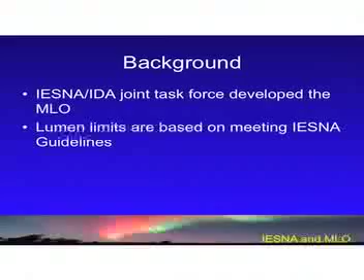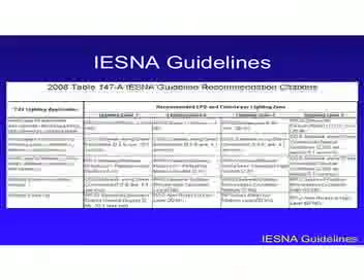When we went through the board review, some of the boards of directors, which was IDA and IES, asked us what criteria was used to develop basically how much light you needed in an area, and what guidelines were being represented. This is kind of a mapping of IES guidelines that was used for the Model Lighting Ordinance. I just wanted to show you that there was something we could point to in every single lighting zone to represent what the criteria would be.

Lighting zone 0 is not there. That was something else we created during the Model Lighting Ordinance, realizing that we needed to have a lighting zone that encouraged no light at all. If a light were on, it's only intermittent, meaning if you have a light near an entry station for a trailhead, when someone approached, the light went on, but when someone left, the light went off. So it's basically not expected to be energized during the course of the evening. Lighting zone 0, of course, has no criteria because it's an intermittent type of light.

The Model Lighting Ordinance's big premise was to not only reduce the amount of excessive outdoor lighting, but also reduce sky glow. The third thing was to reduce light trespass, which is that light in your neighbor's eye or bothering your neighbor. It's a complaint light.

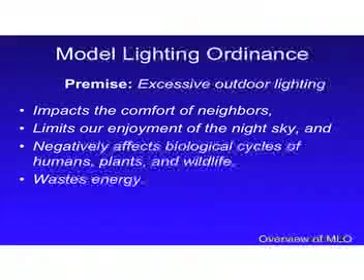Also, in this age of energy usage, wasting energy is a huge issue. So we're looking at some way of reducing energy usage through better lighting or more effective lighting.

The Model Lighting Ordinance is designed to really help city planners and municipalities look at both their new lighting and their existing lighting. The existing lighting would be addressed again during certain renovation periods. Every municipality is going to have a certain trigger point for when lighting needs to be redone, and in the Model Lighting Ordinance, we're making suggestions of when that may occur. But municipalities basically have their own trigger point for renovation.

The good news about having Leslie Lipstein on our task force is that she kept reminding us what city planners were all about. She said, don't write code language for us because we're all really specific. What we need in the Model Lighting Ordinance is the technical information that has been vetted through the technical societies and through the International Dark Sky Association.

This was the important information, so you will see things in the code, like enforcement, that need to be developed by the municipality, because we're not going to tell them how to enforce their own codes. We're just saying you need to have a section there. So in the Model Lighting Ordinance, you will see a lot of reference guiding the municipality through the process, but saying we feel this is important—please don't change the technical portion of the code. But there are other things you are able to change.

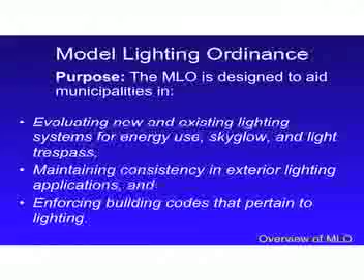The model lighting ordinance basically applies to all exterior lighting. We do have some exceptions there, which are pretty typical exceptions.

Street lighting was an exception in version 1. We've now made that an optional code, or it could be a guideline depending on the municipality. Sometimes street lighting isn't governed by the planning department, it's done by Public Works. So we're not sure exactly where that ordinance would fit in the city process, whether it's in the code itself, guidelines, or policy. It could be policy, but we decided to include it.

In the public comments, the inclusion of street lighting was the number one comment we got. We listened and made a provision for that, which I'm personally very excited about, having street lighting included.

Controls and curfew is something else we've put in, meaning all lighting has to be controlled in some way, and you have to reduce it by at least 30%. That 30% value is there specifically for high-intensity discharge sources that have a real problem going much lower. You can go to 50%, but not all HID sources can be dimmed to that level, and we wanted to make sure we allowed a way to dim the lights rather than just turning things off.

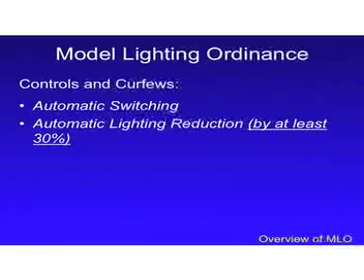For lighting zone 0, we put in the user guide some information on where it may be applied, which would be wilderness areas, parks and preserves, and undeveloped rural areas.

The beauty of the lighting zones is that any community can decide what lighting zone it's going to be. The lower the lighting zone, the stricter the requirements are. A community could say, we are lighting zone 0, we don't want any light on at night or after a curfew time. They can choose to do that.

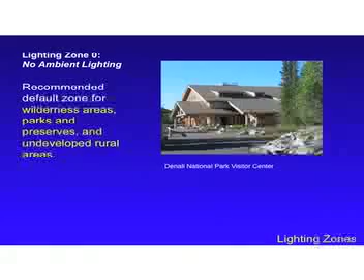Or a community could say, we are lighting zone 1, which means we want and respect really low light, very low glare, and so forth.

But in the user guide, to help communities, we've given some instances. For instance, lighting zone 1 is the recommended default zone. So if a community has no idea what they're doing, they could make their default zone for rural and low density residential areas lighting zone 1.

Lighting zone 2 is the recommended default zone for light commercial business districts and high density or mixed use residential districts. An entire town could say we are only lighting zone 2, or only lighting zone 1. You don't have to have multiple zones in your town to make it simple.

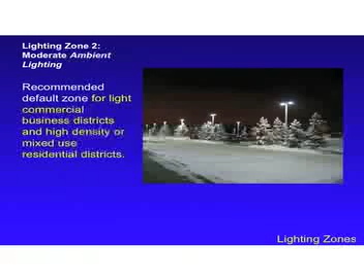So it could be as complicated or as simple as you want. Lighting zone 3, moderately high ambient lighting, is the default zone for large cities' business districts. It would also be the default zone for things like car dealerships or high-end retail that's operating all night long, or you could definitely put a car dealership or gas station in lighting zone 2.

We'll go through an example of how a gas station fits into lighting zone 2.

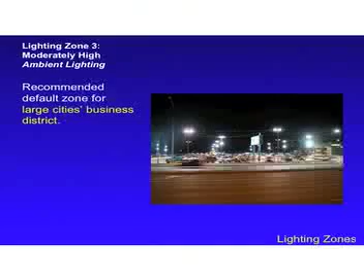Lighting zone 4 is not a default zone, and this is really important. You'll see a lot of high levels in lighting zone 4. We needed somewhere to put in Times Square and Las Vegas, it just had to go somewhere, and just in case they wanted to actually look at their lighting.

Currently in California, through Title 24, their energy code, all their defaults are lighting zone 2 and 3, and that is based on population.

Towns below 50,000 people default to lighting zone 2, and cities over 50,000 default to lighting zone 3. There's a provision that if any city wants to apply for lighting zone 4, at least a portion of it, they can go through that application. In the last 5 years, not one city has asked for lighting zone 4. So currently in California, there is no lighting zone 4. It's a very unique zone, and a lot of us are hoping that no one ever applies for lighting zone 4.

These lighting zones have been really abused in some of the processes. If you look at different codes, I'll use the U.S. Green Building Council Site Credit 8 as an example, which supposedly is for exemplary lighting. Our firm is one of the reviewers for Site Credit 8, and I'd say 80% of the applications coming in say that they're lighting zone 4 so that they can get more light. What I'm excited about is that with the model lighting ordinance, instead of designers and engineers trying to decide which lighting zone they're in, the communities are now going to dictate that and do some planning.

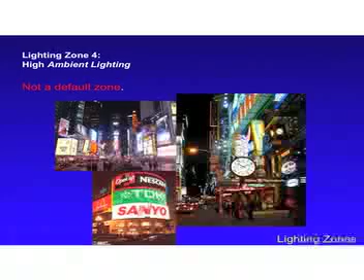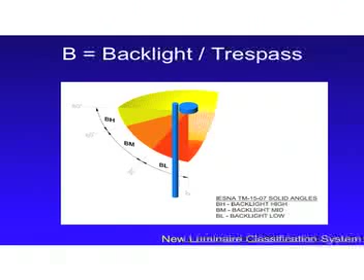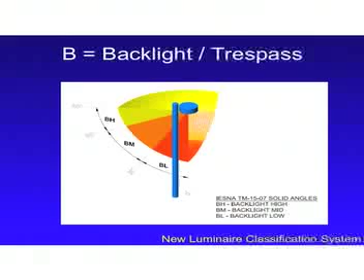If you look at the backlight, which is the B in the BUG system, we're very interested in the backlight low, which is the area that could be directly on the property line, and then the backlight mid and backlight high, depending on the different amounts of light coming out of the zones. The uplight goes beyond what the typical full cutoff was, and it dips down to 80 degrees.

Because of this, when you look at the different uplight ratings, you'll notice that some of them are not U0, but even U1, because of the control of the 80 to 90 degree range. So looking at this is a real improvement, hopefully, over the older system.

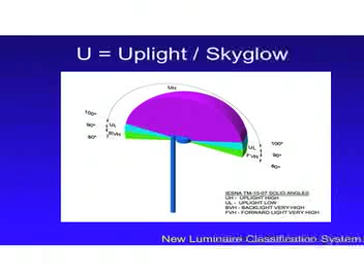The glare metric is something that is brand new to the system, which the older system just could not address. We were able to introduce a whole new metric to luminaires, and this is the glare, which is backlight high and backlight very high. All of this information comes out of TM-15, which is the IES document.

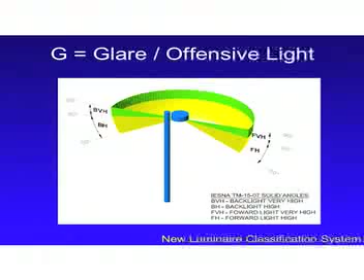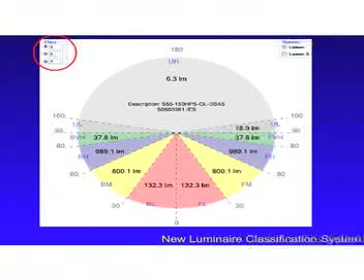Here's an example we got from a luminaire manufacturer, thank you, to show how you would take a luminaire and classify it, going through to look at the different amounts of light that come out of a distribution. Please notice that it's not based on percentage of light anymore, it's based on absolute units.

This is important because you could have the same fully shielded light with a 1,000-watt lamp in it, and it may be BUG 6 or 7, but that same fully shielded light with a very low wattage compact fluorescent could have a BUG 0 rating. So it's no longer dependent on the shape of the luminaire, it has everything to do with what type of light source is in it and how much light it's putting out.

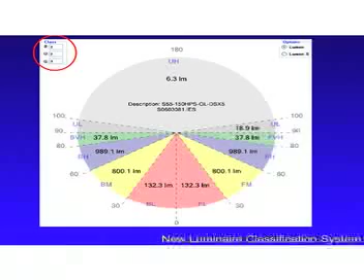But as that luminaire moves closer into the interior of the property, there's going to be less limits on the backlight, to the point where if we're in the middle of the property, we may actually want light coming out from two directions, which would be a typical type 5 or symmetrical distribution. So we need to be able to allow for symmetrical distributions with this.

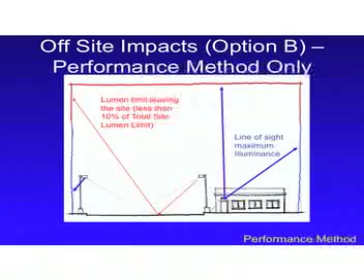That's the second option in the off-site impacts. With this, we actually have a maximum line of sight illuminance. The reason we call it TV illuminance, and a lot of people have asked what that means, is that standard lighting programs have that option. It's something you click, and it's called TV illuminance.

It was basically designed for sports lighting, where a TV camera wanted to see how much light was available to see a player on the field, and they could aim at anything. So you take your TV illuminance and aim straight at the light, see what the offending light is, and that's how you calculate it. It's already available in the computer programs, and that's why that word TV illuminance is used, to make that blend between them.

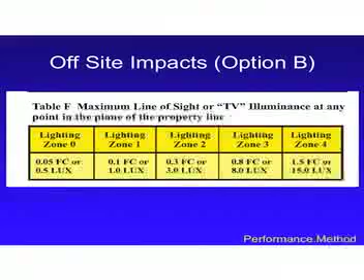So that's the off-site impacts. Now I'm going to go through two different ways you can comply with the model lighting ordinance, and show how off-site impacts are addressed in both. I'm going to go over the off-site impacts again in particular. We've got the prescriptive method.

I would probably say 99.9% of applications will use the prescriptive method. We want to make this very simple. We heard last time, during version 1, that the prescriptive method was too complicated, so we backed way off on it and made it easier. The performance method is for areas where city planners are throwing up their arms and just hoping it's going to work.

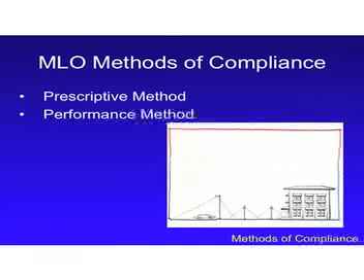This is going to be for the sports field, the outdoor retail, the monument that's being uplit, or the big, huge facade downtown. The performance method is basically for when everything else fails and you can't meet it through the prescriptive method. But we wanted to at least have that option available.

In the prescriptive method, there are two different things you have to do. One is your total site lumen limit—this is to prevent overlighting; you only get so much light on the site, period. Second, your luminaires have to meet the bug rating per lighting zone. So those are the two different methods of doing it.

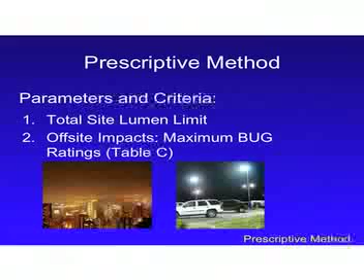Within the prescriptive method, we've got a very simple method for the mom and pops, little grocery stores, areas with a few parking spaces that aren't going to go through a huge city planning effort. This is the simple parking space method, for 10 spaces or less. You basically count up your number of parking spaces and multiply it by how many lumens per space.

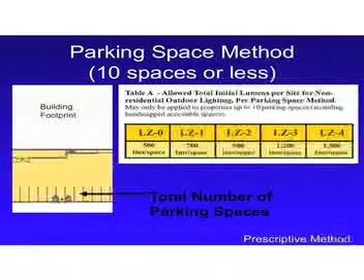Now I want to back up. These lumens that I keep talking about are a unit of light. That's what the light bulb or the lamp puts out. You can see it on the packaging. We figured this is very easy for city planners to use, it doesn't involve any calculations. You basically take your initial lamp lumens, what it's going to put out the day you turn it on, count those up, and that's how many lumens you get per space. So this is simple: an inspector can go out on site, look at the light bulbs, see the packaging or get a count of the initial lumens, add them up, and see if it complies.

The hardscape method, probably the most popular method, basically says you get so much light per square foot of your space, similar to lumens per acre, which some communities have been using. But we're limiting it to your hardscape, which is parking lots, walkways, plazas, anything with finished hardscape. Even a gravel sidewalk or gravel path would count as hardscape. You get so many lumens per square foot of hardscape.

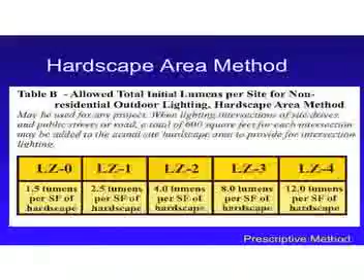Here's an example of how you would calculate your hardscape. You've got, in the gray or putrid green area, your square foot area. If you've got a place wider than 10 feet, represented in blue, you cannot count that - that allows for large islands or landscape area. You can't count your landscape area. But if you have little medians going into the parking lot, you can count that if it's less than 10 feet. This is similar to what planning departments already do for drainage calcs, asking for the square footage of hardscape areas. We're trying to use information that planning departments are used to gathering. Notice it's not distinguished between driveways, sidewalks, or parking lots - it's just hardscape area.

We also haven't looked at facades. We haven't done anything else. All your lighting, all your lumens have to fit within this lumens per square foot, to keep it as simple as possible.

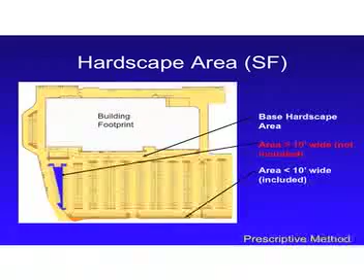One thing we noticed going from version 1 to version 2 of the model lighting ordinance was the incoming LED invasion. We kind of ignored LEDs, or said they're not going to be as important as we thought, but they are. You have to realize LEDs do not have lamp lumens. How they're designed is you put LEDs in a fixture and photometer it, and it's a fixture lumens or luminaire lumens. That's how LEDs are now done.

Well, that would advantage them tremendously if we did not put in an adjustment factor, because all the other lamps are put inside a luminaire and there are losses inside that luminaire. So a typical lamp like a 150-watt metal halide only gets so much light usable out of the luminaire, but LEDs get to use it all. So what we've done is put in an adjustment factor: if you have LED lighting, you multiply your initial lamp lumens by 1.4. That's assuming a 70% typical efficiency on most luminaires. It seemed fair enough that LEDs are multiplied so their adjusted lumens are higher than the typical lamp.

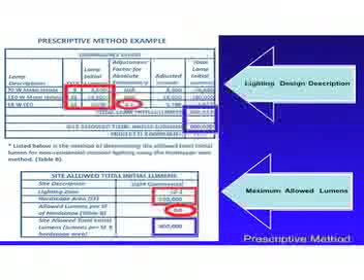So that's a prescriptive method. It's just so much light per site, but you do have to meet the bug rating. So your luminaires, you've got two choices: so much light, but then your luminaires have to meet that bug rating for lighting zone 2, every single luminaire. So it's a double guess. That's going to be most of the submittals for the planning department.

Now I'm going to go through those unusual sites, which is the performance method. In the performance method, we have more things that you can apply. For those of you who did a review of version 1, you'll notice that this used to be the complete site method in the prescriptive method. We have now moved it to the performance method.

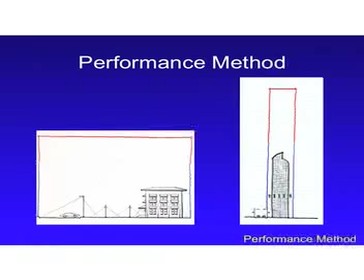You also get additional lumens depending on what you are. This is how we're going to try and help the planning department look at car dealerships, senior centers, fire stations, places that for some reason need more light. So we've got a whole bunch of allowances depending on what they are. This is in Table E, and you'll find Table E goes on and on. The model lighting ordinance is basically trying to anticipate every unique type of situation.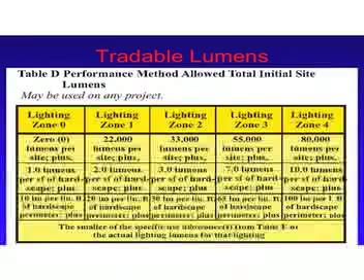These also are use it or lose it. If you don't have this situation, you can't trade it among all the others. Where the first table is tradable, just like the prescriptive - this is how much light you have, you can use it anywhere on the site - these, you cannot. You can only use it where you've got this situation. Again, I'm not going to go through all of these, but it's just more of Table E, and they're non-tradable lumens.

So here's an example using the performance method for a gas station in lighting zone 2. I figured I used a gas station because there's going to be gas stations in every single situation. Every town, whether you're lighting zone 1 or lighting zone 3 town, you're going to have a gas station. So I picked lighting zone 2, to go through the issue of the design and kind of what we discovered in working through this design.

So we have a gas station, and we notice that the C lights are actually the pole lights. The D lights are the canopy lights. The B lights are some wall sconces, and A are just some different lights over the entry. All of these lights are full cutoff, except for the B lights, which are just cutoff wall packs.

You go through and you decide what the type of lights you have, what the different descriptions are, the type of lamp, the initial lumens. If we have LEDs, I need to do that adjustment factor, and then the mounting, and then the luminaire watts. We're just kind of adding it all together, kind of a little luminaire schedule.

And here's how we calculate the hardscape, again, with the perimeter method, or the performance method. The hardscape area is in the green, the single hatch going across. We also have to calculate the canopy, because we've got certain lumens we are allowed under the canopy, and then the perimeter going around. And then identify the different building entrances with the property line.

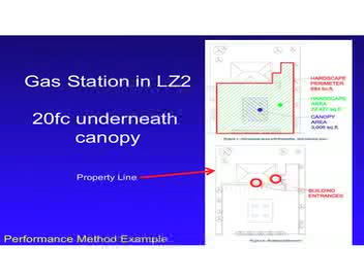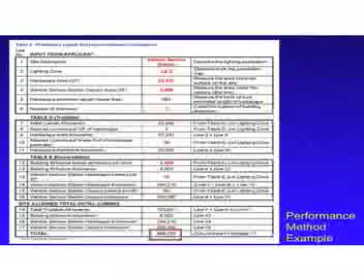Here's the worksheet that you would fill out. Everything in red is what the designer or engineer needs to fill out. Basically, you start at the vehicle service station. We're in lighting zone 2. Hardscape area, we calculate all the paved surface of the site. We've got the canopy area, and then the hardscape perimeter and number of entrances. So that's the data you need to fill in with this particular one.

Then you've got total lumen allowance, per table D per lighting zone, and total lumens per square foot. This is the tradable area, similar to the prescriptive area. Lumens per square foot, initial lumen allowance, and then lumens per linear foot. Table D is all tradable. This is your normal stuff.

Then table E is the extra stuff because you happen to be a gas station. You get so many lumens per building entry, and so many lumens underneath the canopy. In addition, it's a layered approach. The first layer is table D, the second layer on top of it is table E, so many lumens per canopy, and then the hardscape.

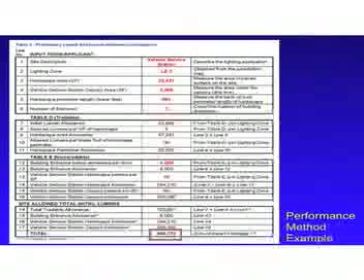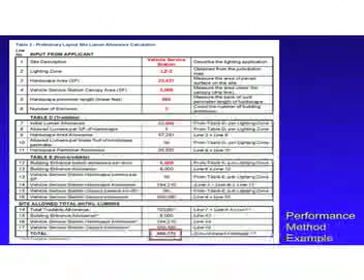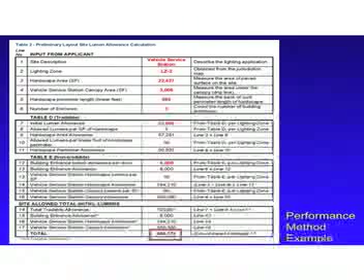So that's step 1. Step 2 is the off-site lumen limit. Step 1 is how much light on the site. Step 2 is how much light is leaving the site. So we went through and looked at, is it compliant? Yes, only for step 1, which is how much light is on the site.

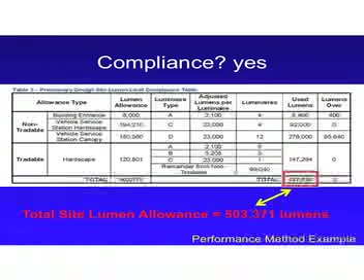Step 2, you have two different ways of doing it. You can go back to the bug ratings, which is simple. All the luminaires on site have to meet the bug ratings for lighting zone 2. Very simple to do. We looked at all of these and what the bug ratings were. And if you look at table 5, the bottom one, everything in red means it does not pass the bug ratings. Even though we had not too much light being lit, and by the way, this gas station is only lit to 20-foot candles average.

It's not a huge lighting gas station. But because of the selection of the equipment, they do not meet the bug ratings, and a lot has to do with the pole lights, which is in red. Why? Because they're too close to the property line. The backlight was too restrictive on it. And then some of the uplights we had some problems with too.

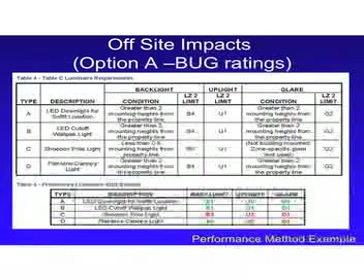So, gotta go back, gotta redesign. If we can't make it, beat it, we're gonna go back and redesign. What we had to do was lower the wattage of the pole lights from 250 watt to 150 watt. Maybe put in some house side shielding to try and reduce it. We had to reduce the number of other lights in order to comply. And then all of a sudden we were able to, notice that our total site lumens dropped, but we're still within that 503,000 lumens, so that's not a problem. But all of a sudden the bug ratings now comply. So that kind of goes through on how you have to redesign a site.

Well, there's another method of calculating off-site limits, and that is the direct line of sight. Remember I said so much light can't hit this box over the site - it's like a maximum light. So we went through and looked at that, and it turned out that our maximum line of sight was the red 1.6 foot candles. All that is allowed is 0.1 foot candles.

So it did not pass the maximum line of sight. And what was surprising, it had nothing to do with the light coming from the luminaires. It had everything to do with the light reflecting underneath the canopy and going up. So all of a sudden, in the model lighting ordinance - this is something I'd love some feedback on - should we include reflected light in our direct line of sight calculation or not?

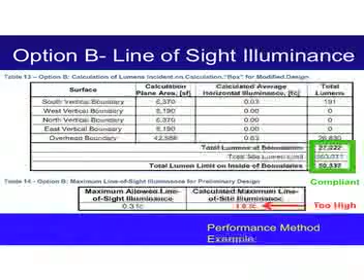Okay, now I'm going to go to residential lighting, which is another option. This basically has nothing to do with total lumens or anything. It's based on specific equipment only. What we've got is maximum allowed luminaire lumens for unshielded luminaires at one entry only, which would be probably your front porch. A lot of people still have a glowy something at the front porch, so we're going to allow that, but you'll see how strict it will be depending on what area you're in.

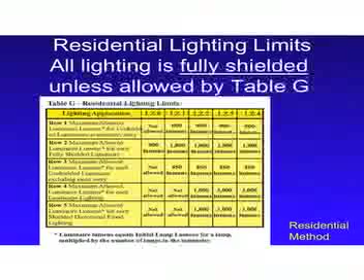Then you've got other areas, and I'm going to go through an example of each of these specifically. So here's my house. I've got luminaires at the front porch, which is luminaire A, and a fully shielded one over the garage, which is luminaire B. I've got a small wall sconce in the back entry, then a shed with a light, and a little post top light on the driveway. So this is my little luminaire house design.

I'm going to be in lighting zone 1, since a single family house should be in lighting zone 1 or 0. I look at my front entry light: I've got a 9-watt compact fluorescent which produces 600 lumens, and that's all I'm allowed for my glowy thing - a 9-watt compact fluorescent or the incandescent equivalent. That's it, and it meets it.

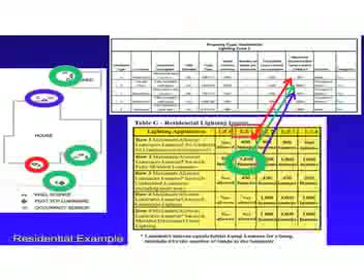Next, I've got the light over the garage, which is a 23-watt compact fluorescent, fully shielded. All of these, well, the 1800 ones have to be fully shielded, otherwise they're not allowed this much lumens - 1800 lumens. My 23-watt compact fluorescent is 1500 lumens, so I meet it with that.

Then I've got that light at the back entry, and that is a 7-watt compact fluorescent, which produces 400 initial lumens, and yes, that meets it too, at 450 is the allowance. All my other lights are fully shielded and within the 1800 lumen limit. So this particular design does meet it in lighting zone 1.

Street lighting option - this was what we added as an option for municipalities, like I mentioned earlier. Basically, it's saying you need a master plan for street lighting. Where this is important is what street is in what lighting zone. This is really important for the municipality to go, oh yeah, we're lighting zone 1, but we're going to run a huge commercial street collector right down the middle.

Warranting, this is what Leo really pushed - do you need street lights or not? There's a huge discussion in there about warranting, to first say in your master plan, you've got street lights, but do you really need them at all? And then we also talk about turning lights off or decreasing them during curfews. Again, that would be adaptive standards, a method of decreasing lighting level over the course of the evening, or even a seasonal effect - if you have snow on the ground, you may not need as much light.

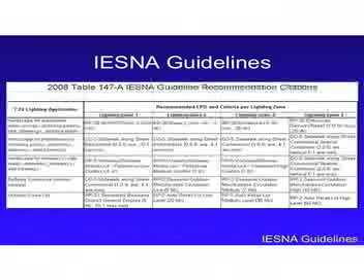I think it goes back to the recommended practices of IES, that there are many different flavors and ways you can light a parking lot. Many of the recommended practices understand that there are different ambient circumstances for different lighting situations - a hospital parking lot may have a higher lighting level, or a big box parking lot may have a higher lighting level than an office park or a church parking lot. The Illuminating Engineering Society talks about different ambient levels and also pedestrian activity in the parking lot. They do vary the parking lot levels depending on what the use is and where it's located. We followed that in that first chart I showed you on the mapping of all the different recommended practices.

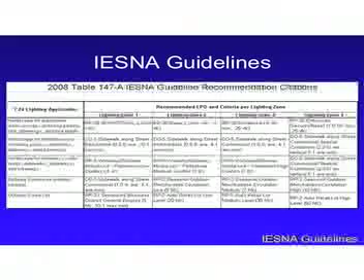Basically we went through and showed that parking lot lighting levels did vary in the recommended practices. In reality, is that important or not? To get the model lighting ordinance out, we did not really want to fight that battle - that goes more towards the application committees of the IES to look at it. I think the biggest hurdle will be retail mall parking lot applications, which are now being lit to a minimum of 3 to 5 foot candles. Well, at least we're saying you no longer can do that - you're going to be a lot lower, where your minimum is going to be closer to 0.6 foot candles instead of 3 to 5. So we're making baby steps in that direction, but that's an excellent question.

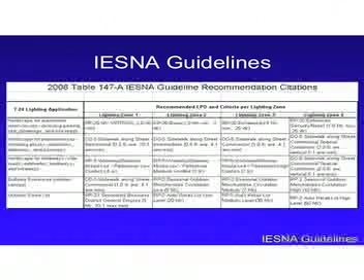Is another question coming? Yes, I've got several questions, but the most burning right now - first, I really like this idea that we're now saying the community should have some autonomy in this, to decide what they want their community to be zoned as. My concern, though, is if you think in an ecological buffer zone framework, like a biosphere reserve, if you have a community that wanted to be a zone 1, and an adjacent community wants to be a 3 or a 4 - and as we know, light pollution is a negative externality that can affect areas up to 200 miles away from the source - I'm wondering, when a community says 'this is what we want to do,' how much education do the surrounding communities have?

Do they realize, okay, I may have lighting, but I'm not really safe? Do we know what their motivations are, and do they have enough information to make an informed decision? Because I'm thinking right now they don't. So to that end, to what extent is IDA going to continue to educate about light pollution in regard to choosing the zone?

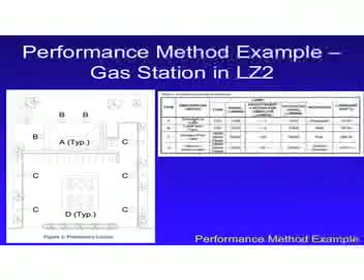Just so they have something to compare with, similar to what I do at the gas station and residential examples. It'd be nice to develop a booklet of these to help the planning department feel more comfortable with what's going on—if nothing else, to look at the abuse in somebody not giving a correct submittal. That's the main thing, to get them more comfortable with the lumen limits.

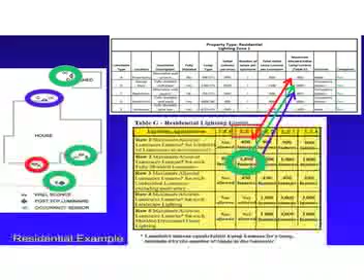What you've done is a very nice solution to a hard problem. The really harder problem is the whole warranting issue, which is when you put these fixtures up at all—that's actually a more difficult question. And street lighting and signage is another area where there's a lot to be done that nobody's gotten into.

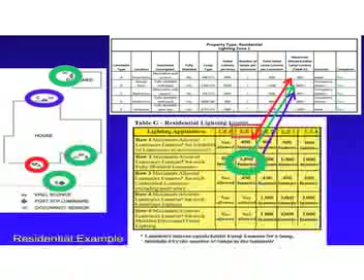Right. All the lighting ordinances I've looked at, and of course lots of them are really pretty bad. Yeah, as we know. So, we actually have one more question.

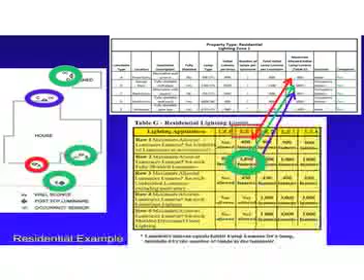Okay, question on... Yeah, we have a question online. I hope you know what this means: Is it contemplated that the applicant or the designer is still responsible for the minimum HFC or VFC in the IES RPs, independent of the MLO? How is this expressed in an ordinance, and do you see liability issues here?

Okay, I think they're talking about—and I'm just going to look at the question right now.

Horizontal foot candles and vertical foot candles. Yes, the designer—one thing about lighting ordinances...

It's very important that a community makes two decisions. One: are you only going to regulate bad lighting or impact on other people? We really don't care what you do on your site. Doing vertical foot candles, horizontal foot candles, that's between you and the owner, whether you're designing to IES criteria or not.

All the community really worries about is if you are impacting your neighbor. What this ordinance is about is impact on your neighbor. It is not saying you have to light well, because some communities have said you have to meet IES criteria. The problem is the person who decides not to light—they've got a sidewalk, and if a community says you've got to meet IES criteria, you may actually be increasing the amount of sky glow by forcing someone who says, I don't want to light my sidewalk or parking lot, I'm closed at night, I'm going to turn off all the lights.

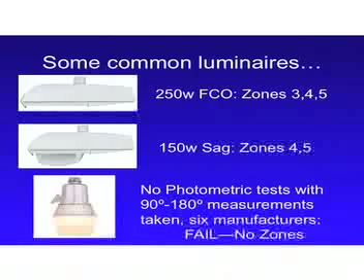Right, I think that's an excellent idea, and I would say some creative manufacturers could actually promote that they do have BUG ratings posted on their pole some way. Kind of like when you change out a light bulb, it's a maximum wattage rating, and it could be inside the luminaire or whatever to do that.

Back to the education of lighting planners, I think there's huge education needed on what full cutoff meant, and even if you had a full cutoff luminaire and it was tipped up, now it's a floodlight, they'd say well, it was full cutoff. But again, it needs to be installed flat. It's the same type of education, and I do think that between the luminaire manufacturers helping out with the BUG ratings and what it means, and some examples like what we've done, maybe a full typical catalog of different lamp wattages and what to expect with BUG ratings.

And diagrams, same thing as what we had to go through with full cutoff, because what we're noticing here is it's more complicated than full cutoff, but it's more restrictive than full cutoff, and that's where we're hoping to go, but it is going to take some learning of what that is. So any suggestions would be great on how to do it, because the transition, whenever you move from one system to another, we have some learning curves to go through.

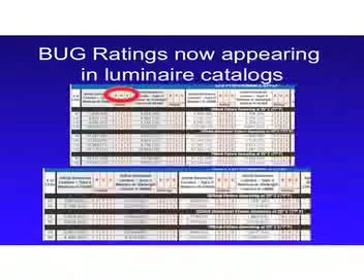Yeah. Right up close, and it echoes. Does that go good? Yeah, it's good. First of all...

I have to say that this is a great improvement over version one. Really substantial progress. This is not to say I think we're in the right place yet, but it's a big improvement.

I thought I would pick up on a couple of other comments. The lady over here who was talking about the need to educate as to what is the appropriate lighting zone - as she was talking, a simple thought occurred to me. The way this is written currently, the term is 'default.' That's a term that I think is kind of a techie, scientific term. How about just 'recommended'? This is the recommended zone. I think that conveys much more strongly that this is what we would like to see.

I think that's an excellent idea. And I hope someone's recording these comments. We are - it's not only written, but also we're taping this, so it'll be good. Great idea.

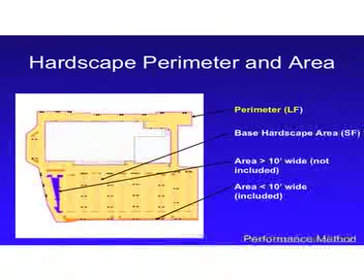Beyond that, it's a new concept, and I know you and I have talked about this whole thing. I'm hoping that even this helped, taking this and expanding it a lot more on not only the good stuff, which is what we did in the other slides, and full cutoff types of stuff. Go to the luminaires that we have mostly found offensive in our communities, the drop lenses, cobra heads. Go and really work on what these are, because in my mind, those are the ones that would be the first attack, to get rid of the non-shielded lights. So I agree with you.

We need more education, absolutely, and we need more illustrations of what they are, and lights to help the planning department. Maybe it's a 3D thing. I don't think so, it could just be a chart with pictures, typical lamp wattages, and here's what the bug rating would be for that. Of course, I also think we need to get rid of across-the-board uplight, but I think that's a discussion for this afternoon. Across the board of what? Uplight.

Are we at break? Thank you for your patience. We all took a needed break and got coffee. I have no idea where the coffee came from, but I didn't get any. What would you like? Black, just black. Thanks, Kelly.

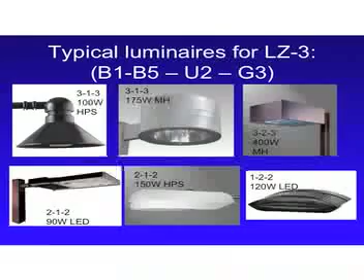Okay, question from webinar land. Backlight rating of B3 greater than 2 mounting heights from the boundary in lighting zone 1 seems to eliminate type 5 lights. I don't know if that's a typo, or he means type 4 lights, even in the lot interior for such a zone. There's no orientation requirement, so that backlight seems irrelevant. What's the rationale?

Basically, if you look at, and it's going to take me a minute, I wish I had seen that question ahead of time. Is your mic on? It's in TM15 that talks about if you have a type 5 luminaire and how it's rated.

We'll tell the person we will get back to them on exactly where that is. I need to look at TM15. There is a footnote. Oh, you have TM15? Is it the addendum? Luckily, somebody's got TM15. Excellent, thank you. It's not necessarily the whole thing. Oh, here we go, in TM15, I found the definition of it.

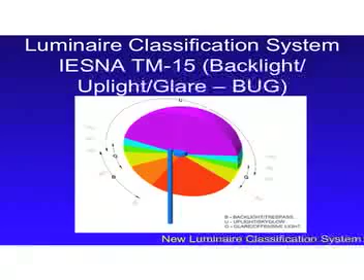The response is that we did talk earlier about the education aspect to city planners, in probably having a matrix to show all fully shielded lights that they're used to seeing, and to see the differences in the light source and how that affects what kind of zone you are allowed in. And we did have some slides that showed the different lighting zones and what the wattages would be typical for those lighting zones.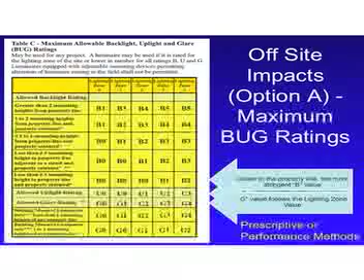Depending on if you're close to the property line or not, yes, it's going to need education. In fact, I commented on your lamp lumen chart that you have published on the web. I use that all the time, and in fact all of my examples use your lumens that you put in that chart. Education like that—here's what initial lumens is, versus mean lumens. If you're getting an application that shows mean lumens, that's not right.

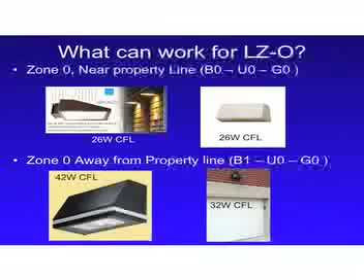And I would love something else like that just for typical BUG ratings. Because in our chart—and I'm going back to this particular slide right here—notice that these are all full cutoff luminaires. Slide 21 actually looks at what is allowed, whether you're close to the property line or not. And then slide 22, going to lighting zone 2, again all full cutoff luminaires, but showing the differences between them.

I would anticipate an expansion of this, and again I mentioned Bob Crelin, using maybe his typical luminaires, the good and the bad, to really show what is allowable or what is not. And then going back to some common luminaires, the 250 watt full cutoff luminaire, what's allowed in different zones, etc. We need this in order to move to a new system.

You're right, fully shielded—and the abuse of fully shielded, where you take a fully shielded fixture and tilt it up—really, no, you need them pointed down, and we need to go through some simple education on that. Yeah, proper orientation is an issue with whatever kind of standard you've established for controlling the direction of light.

Just one minor comment before I go to my question: you gave examples there of about 15 fixtures with their BUG ratings attached. For the lighting code to work, we're going to need that expanded to tens of thousands of products. And conservatively, on a monthly basis, probably 10% of those are changing in terms of availability or new products being added. It's a dynamic environment out there, particularly in LED fixtures, but even in HID fixtures.

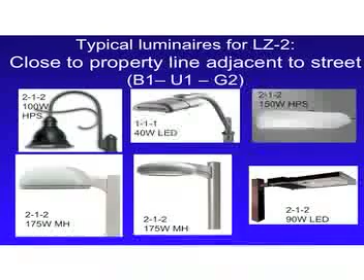So I'll hand it to Jeff. I have a comment, maybe a question to Chris's comment. I think you brought up a good point, Nancy, where the MLO is basically concerned about the outside or offsite impact of what we're doing, which is a domain that IESNA doesn't cover at all.

It just covers what's in your property, in your lots. And Chris, I think there's a fundamental difference between IESNA RPs and MLO, as IESNA recommends a minimum that you should be doing on your property so that you can provide visibility. MLO is geared at a maximum. So now the maximum has become the minimum. So I believe that's a connecting point between the IESNA universe and the MLO universe that is fundamentally different.

Because people, or the public, were abusing their freedom to use light because it was cheap and available, and they put in more light. And now with MLO, we're looking at a maximum, suggesting that the minimum is better, instead of proposing a minimum and letting people say you can use more if you can afford more, go for it. So there's a fundamental difference between the two, and I see a drive as people start competing within the MLO confines to do better, because the numbers are driving toward better use instead of more use. So that's why I see there's a lot of hope in the MLO as a practitioner.

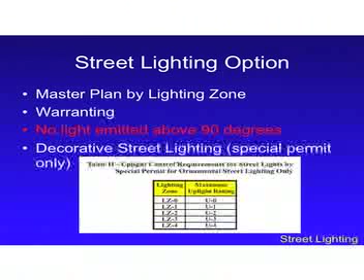To me these are areas where we should ask: are lumen allowances too high, are we allowing too much light? We're doing light loss factors and everything else that can meet IES documents. These are issues we'd love for you guys to model, to give us feedback on, to test whether we're too high. One IES board member said our car dealership lumen allowances are way too high, and we are now going to do more modeling on that. So please give those comments in—that's what the public process is about.

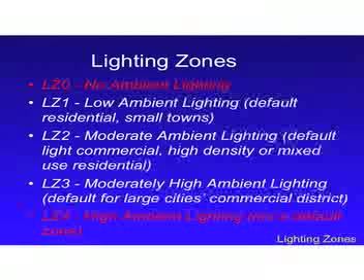I totally agree, I couldn't agree more. In fact, we vetted this through Anchorage. There's a community that has been looking at this model lighting ordinance, all the different versions, going through it as an alpha test site. They've gone out and done site measurements of existing sites where their planning department and local IES section has said, this we think is good lighting. Everyone goes, yeah, this church parking lot, fully shielded, looks great. Yeah, it's next to residential. Okay, a little too high at the property lines.

They've gone through and measured, evaluated, and then tried to see if they could meet what they thought would be a lighting zone 2, whatever. Actually, some of their comments back, like the backlight issue, has been a result of them going out and trying to vet this whole document. It's been very, very valuable.

They submitted this through their community to all the engineers, mostly the engineers, asking what are the typical luminaires you use, the catalog number, the lamp wattage, and so on at different sites. They gathered this, and we did an entire bug rating system and looked at the lighting zones for them. What that did is, for the luminaires they were familiar with, they got bug ratings back and learned what it could be and what lighting zone or not. That's what Anchorage went through.